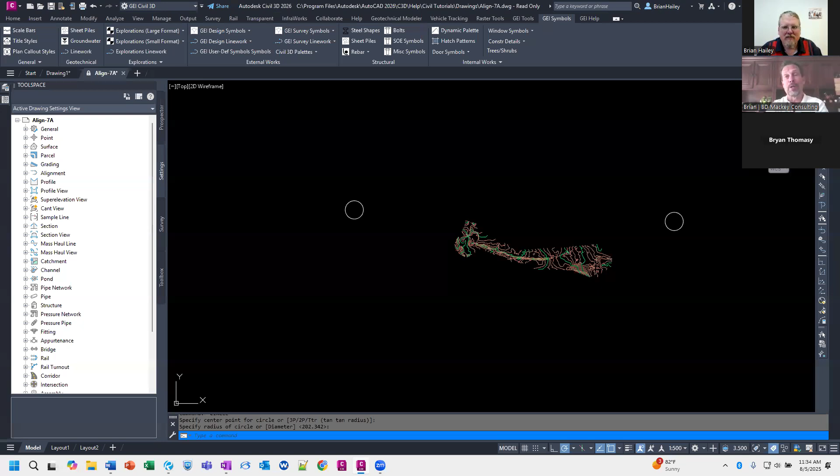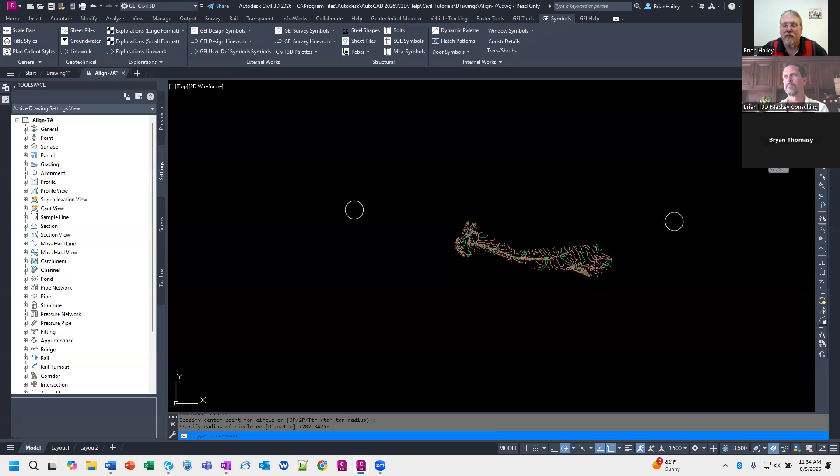I always like to start off showing something in Civil 3D before we get started, while we're waiting for the flood of questions to come into the Q&A panel. Hint, hint - again, if you don't put in questions, there's nothing for us to talk about. So please put questions into the Q&A panel. I thought what we would talk about today is smoothing. I've heard lots of people say, ooh, I hate those jagged contours that Civil 3D creates. I want to smooth the contours, make them look more realistic, maybe more realistic of what's really out there. So we're going to talk about different ways of smoothing when you're working with surfaces.

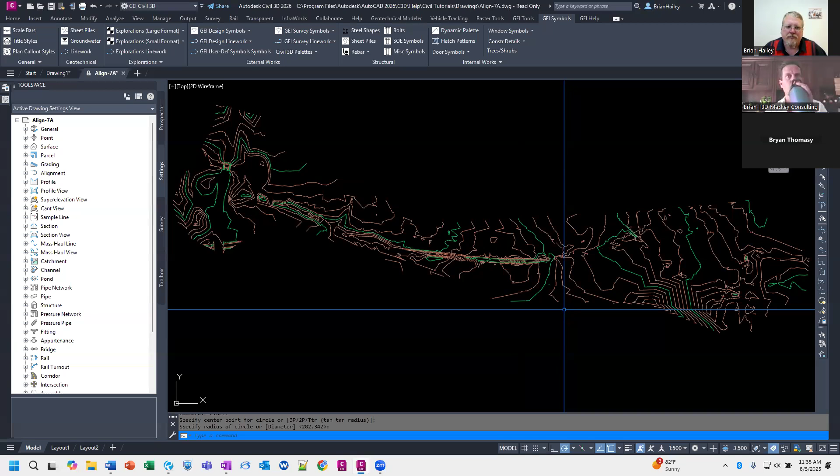The first option is to smooth the contours. Now, the way you smooth the contour - you can see all these very harsh angle points on these contours. I'm sharing my screen, right, Brian? You are, okay awesome. What we want to do is ease this up a bit, so I'm going to stay zoomed in here on this surface. Ooh, this might actually be a really good spot to demo - I'm going to move that off the screen for now, we'll come back to that. All right, I'm going to go edit the surface style.

So in the surface style, on the contours tab, we have the option for contour smoothing. Right now, the surface - the contours are not being smoothed. If you notice, I corrected myself from saying surface to contours, so we are smoothing the contours. Keep that in mind - I was going to ask that question when you said hey, we're going to smooth the contours, and I noticed you kept saying that. I was curious, is it going to smooth the surface, or is this just cleaning up the contours? So there's a very distinct difference here, and I'll explain what the difference is.

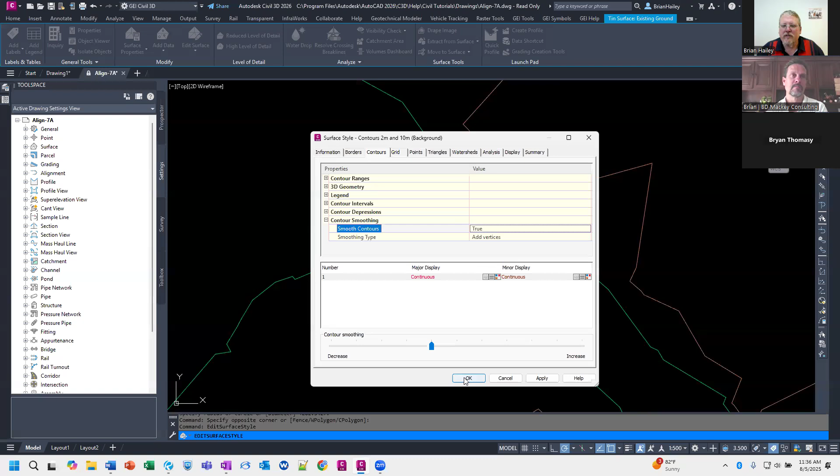I'm going to change this from false to true, and simply hit OK. You can see these contours are now much smoother. All right, if I go back into the style, you'll notice that there's a contour smoothing option down here at the bottom.

So if I bump this all the way up to the top, they're now even smoother. What this has done is smoothed the display of the contours. This is not to smooth the surface, this is to smooth the display of the contours. And you can run into situations where contours actually end up crossing each other based off of the smoothing.

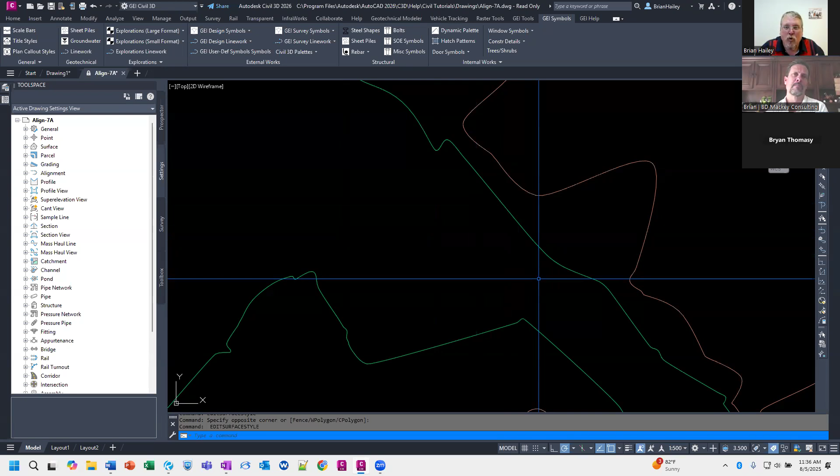Which is what I think might happen down here. Oh, that was close. No, go... right there. Yeah, boom. See, it's crossing, the contours are crossing each other. And the reason is we didn't smooth the surface, we smoothed the display of the contours to make it look better.

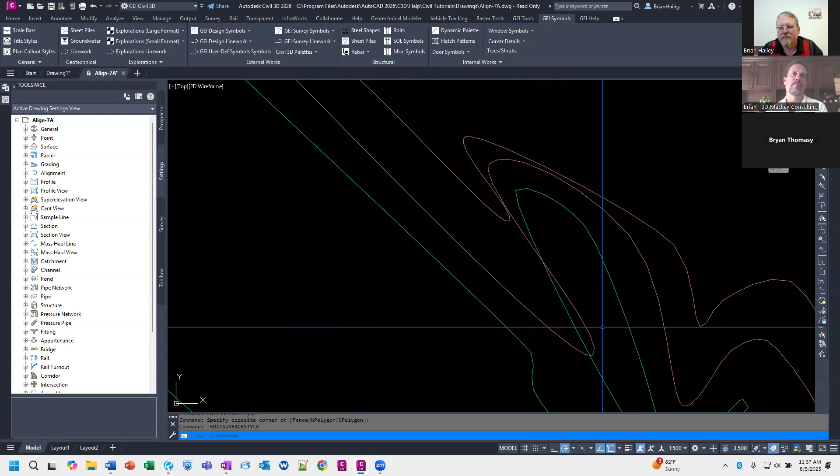Correct me if I'm wrong, but didn't it basically just say, hey, I'm going to take a polyline and convert it to a spline? I mean, that's basically what it looks like it did. And that smoothing factor deals with how severely it's splined. I don't know if it's exactly that, but it's that concept, right?

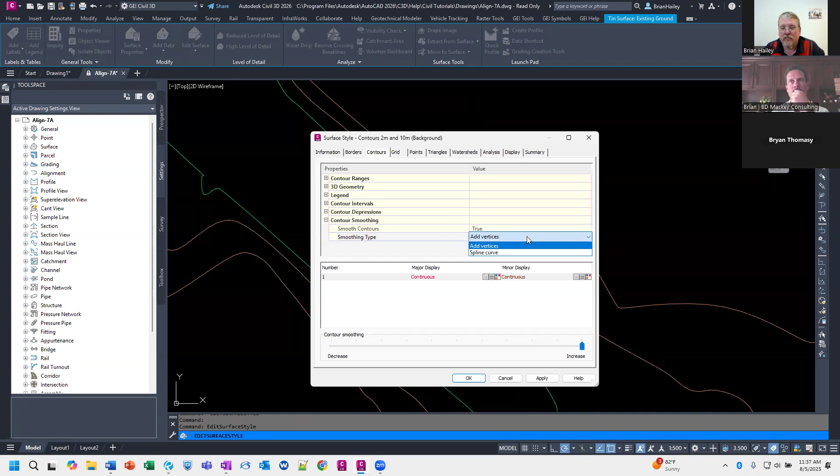Let me go back into the surface style. What you'll notice under the contour smoothing is there's actually two different options: one is add vertices and the other is spline curve. Right now it's set to add vertices. What I'm going to do is extract all these contours as polylines so we can see the difference between add vertices and spline curves.

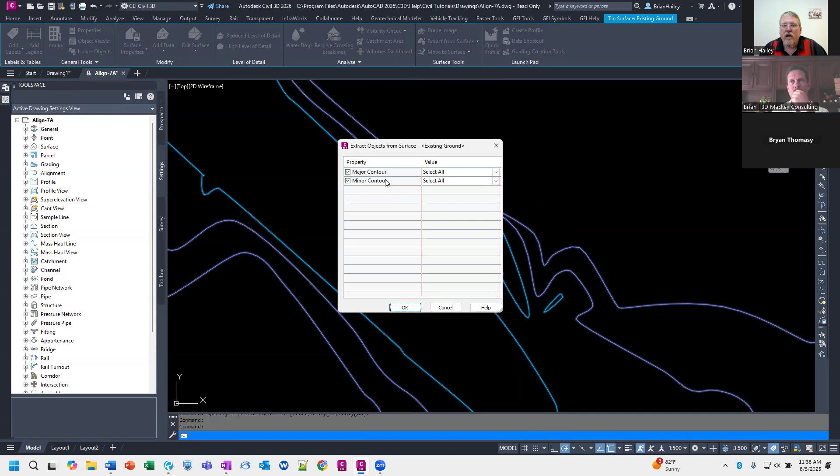I'm going to select the surface, go to extract from surface, and extract all the major and minor contours. Now you can see we've got polylines on top of the contours. Let's change the display of all of these to red, just so we can see them better, and send them to the back of the draw order.

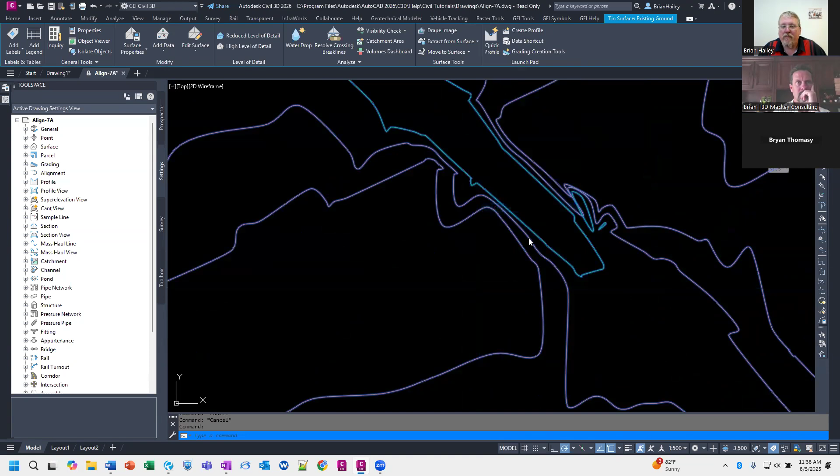So they're still there, the surface is displaying on top of them. Now what I'm going to do is change that smoothing type from add vertices to spline curve. So go back into the surface style, and I'll change that contour smoothing from add vertices to spline curve.

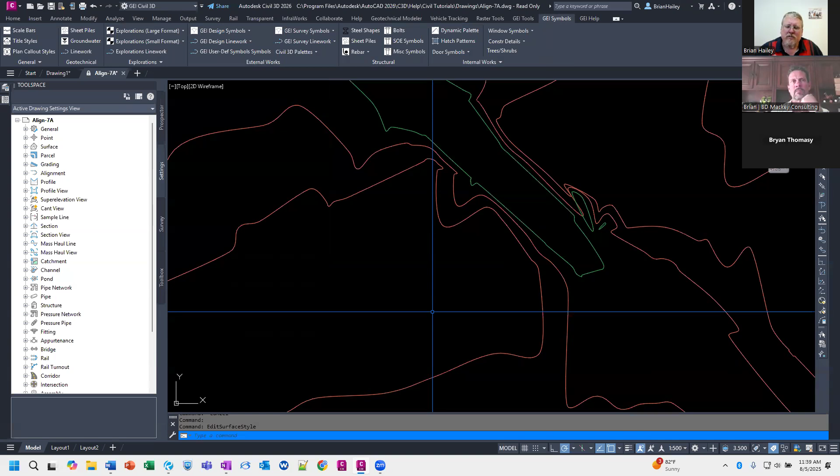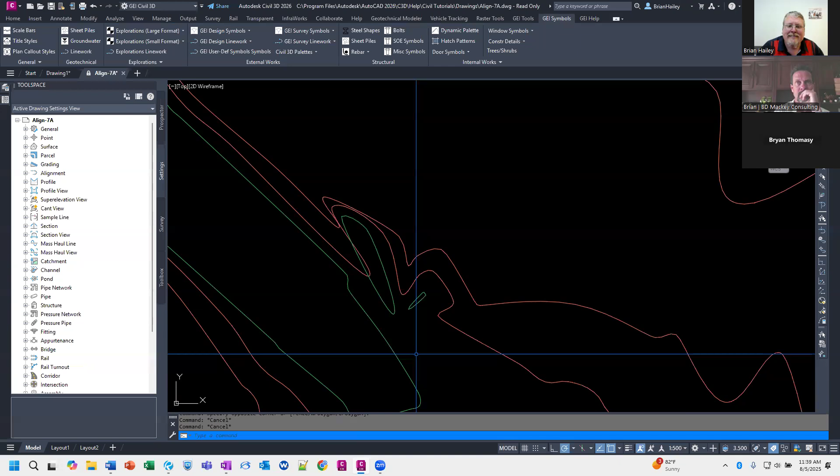What you'll notice is this contour smoothing option is no longer available for spline curve. When I hit OK, you'd expect to notice a huge difference between add vertices and... wait, there's no difference here. If there was a difference, I should see all those red polylines underneath those contours, but they're not showing up. So as far as I can tell, there is no difference between add vertices and spline curves.

The only difference I've found, let me go back into my style, is that when this is set to spline curve, you don't get the option to change the smoothing factor. Now, I have a question: before you changed it from add vertices to spline curve, you went and did the increase/decrease - does that affect the spline? It does. You just can't change it when it's set to spline curve.

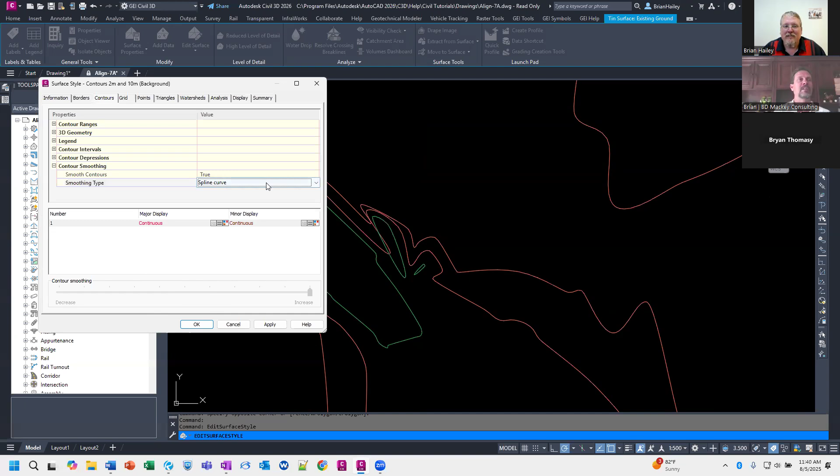So if you go back and change it to add vertices and decrease it, if I set it to say halfway, you'll see all those red contours under there because they're now different. But let me go ahead and do that same thing again - I'll erase all those polylines I've drawn. But if you were to do spline now, it's going to use that new value. Exactly, that's what I was going to show.

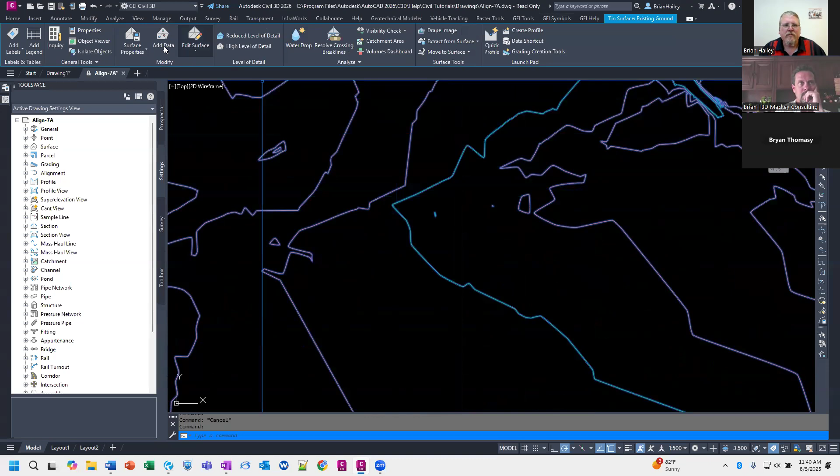We'll go ahead and extract all those, extract from surface, extract objects. Again, we'll make all those red and send them to the back. Now if I edit the style and change that back from add vertices to spline curve and hit OK, again, it doesn't change.

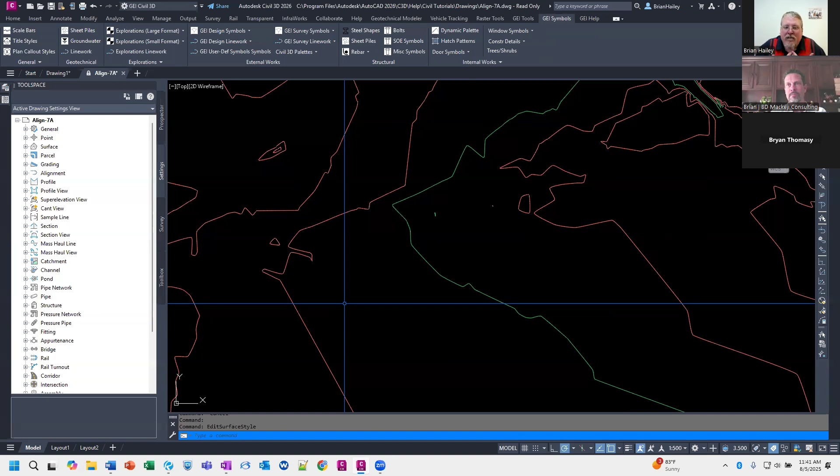I have absolutely no clue why those two options exist, and why spline is even there as an option. There is zero difference between them. I even went so far as to extract the contours using one method, extract the contours with the other method, and do a map clean on top of them - it deleted exactly half the objects I created because they were all exactly duplicate. There is no difference. If anybody knows of a difference, please, I would love to know what it is.

So my question is, is that like an old thing where they originally did it and automatically just had the add vertices, and then somebody came back and said, I want splines? They didn't want to remove the old stuff, so you get both options?

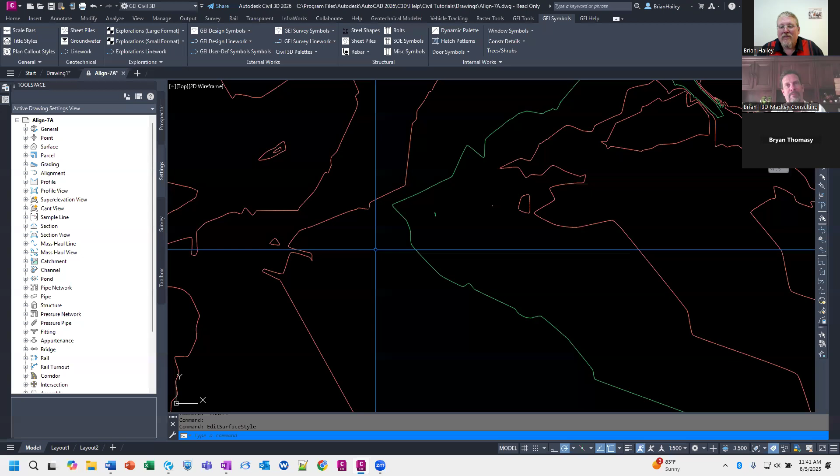Could be, but here's the fun part. If I go into the help file for this, we go down to the contour smoothing.

Add vertices. Add vertices along the contours. This option supplements points on the contours when smoothing them, giving them a more noticeably curved appearance while maintaining the highest level of integrity relative to the surface.

Spline curve. Passes a spline curve through the contour points. This option creates the smoothest contour representation. No, it doesn't. It creates the exact same contour representation as add vertices.

That's funny. Yeah, so Robert asked to follow up: if you extract contours, when it's set up as add vertices versus spline, do you get a polyline or a spline? You get exactly the same thing. So even when you extract, it doesn't matter, like hey, I'm extracting polyline versus spline.

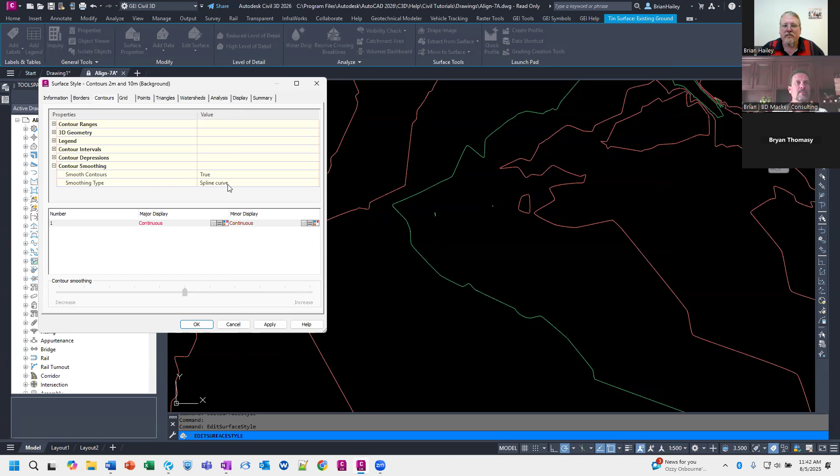So you can see it's set to spline curve right now. And if I go ahead and get rid of all those ones that I had created, we'll extract again. Actually, let me do this. I'm just going to take those. That's why I drew these circles in here. I'm just going to move them from the center here to the center over there, and that way I just moved them over.

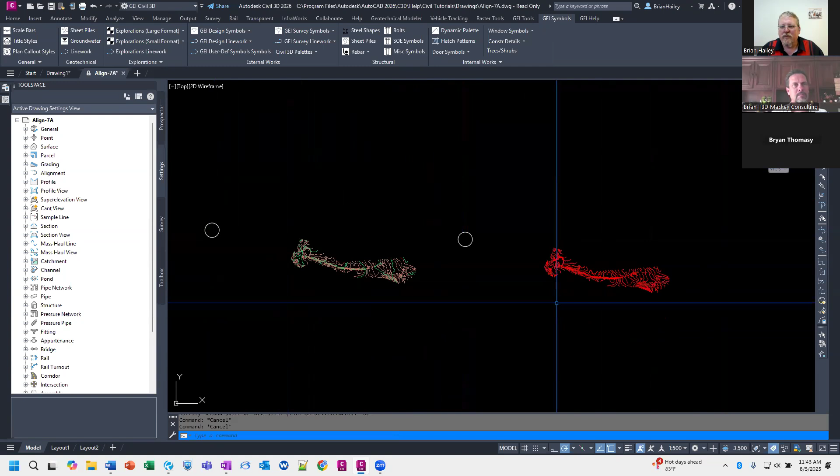But if it's set... I'm pretty sure it's set. Did I change it to spline? Yeah, it's set to spline curve. And now when I extract, I still just get polylines.

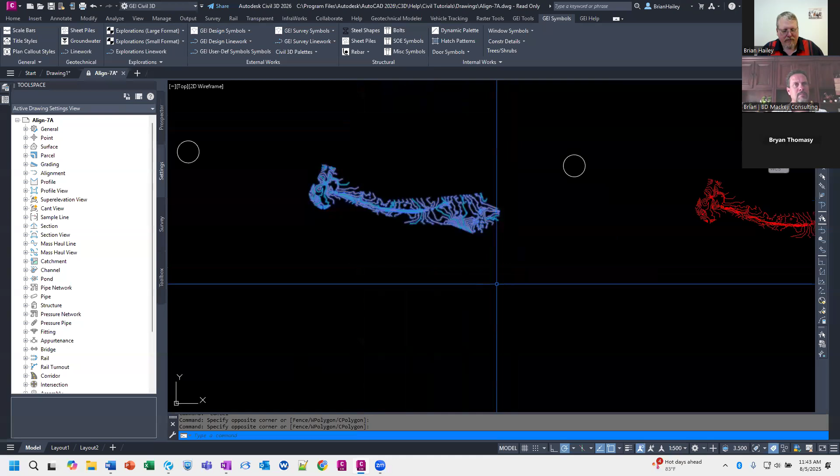And if I copy these, if I just move these, I'll just move again from the center to the center, so all the copies are right on top of each other. And I do the map clean. Go ahead and select those, and the only thing I'm going to do is the delete duplicates with a tolerance of zero.

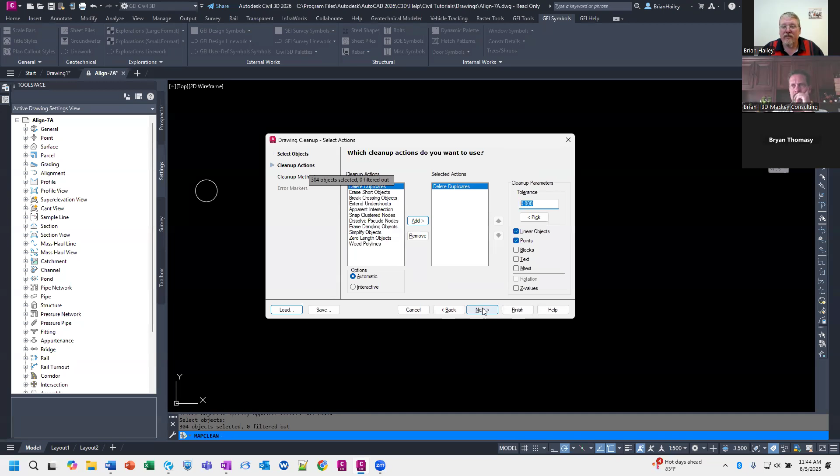So in order for them to be considered duplicate, they have to be exactly the same. So you can see 304 objects were selected. Half of that would be 152. So if it deletes 152 objects, we know they were all exactly the same.

Brian, so if you ever have somebody say, oh, you should be using this one instead, you can just say bullshit. Why? You can say, explain to me, show me what the difference is, and then maybe I'll use it.

And Brian said he loves this idea, but he runs into performance issues when the polylines have too many vertices, for the smooth contours.

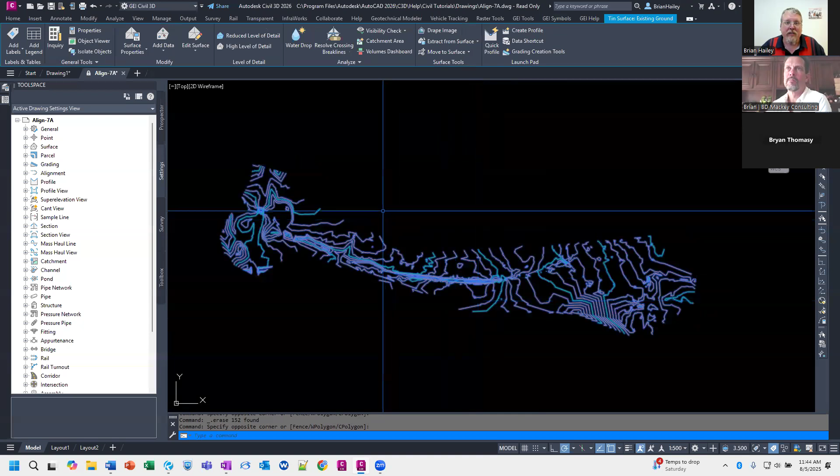Okay, so that's smoothing the contours. Now, actually, let me show something here real quick. I'm going to edit the style and set this back to the maxed out smoothness that we can possibly get for this. Set that back to add vertices, we'll bump that up all the way. And here's one of the issues you might run into when you're dealing with it.

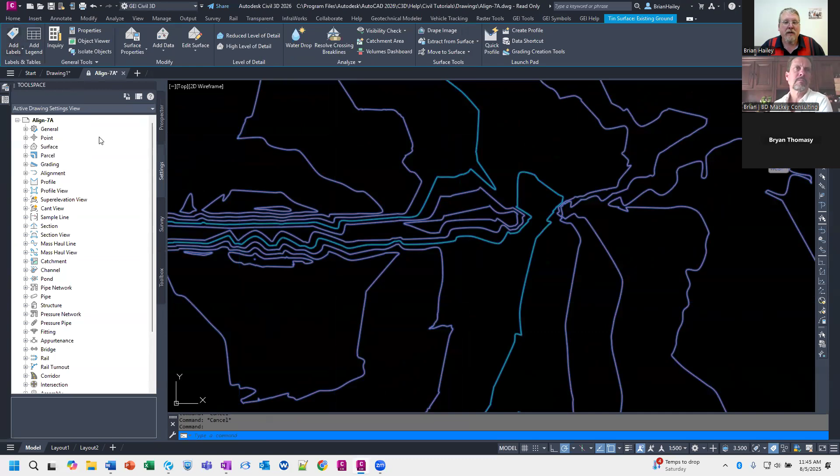So what I need to do is put in a spot elevation label here. So I'm going to grab the surface, add labels, spot elevation, and I'm simply going to snap to this contour. And what you can see, this contour is passing over a spot that is at elevation 61.95.

This label is labeling the elevation of the surface. The contour has been edited so it looks smoother. It did not smooth the surface. In essence, what has happened here is we have changed the display of the contour relative to the surface in order to make them look pretty.

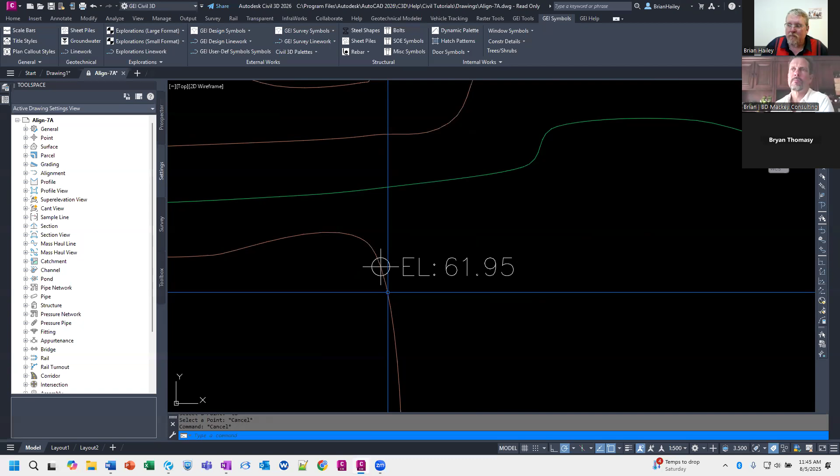We did not change the surface, right? So when you're dealing with a surface and your contours, what's more important? Is it more important that your contours look pretty, or is it more important that your contours show you really what's happening with the surface? So, one's not always right, one's not always wrong.

Yeah, I was about to say, so you're saying appearance versus accuracy. Right, exactly. Yeah, and I've got my own opinions on that one. So as an engineer, when I'm working with the surface, I want the contours to give me a glimpse into what the surface is actually doing. I actually want to see the roughness to it, it gives me a glimpse into the surface.

However, if I was going to take this and print it out on a foam core board, stick it on an easel and put it up in front of city council, maybe in that situation, the pretty contours are more important.

So basically, you're saying always smooth the contours before you give it to an architect. As the guy who works with architects, yeah, I'm just basically saying spline the crap out of it if you're going to give it to an architect.

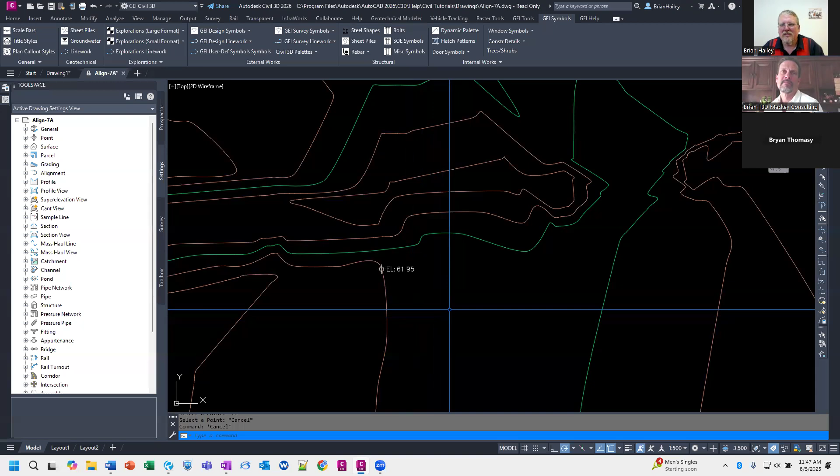Yeah, I'm in agreement with a lot of individuals. I like the accuracy, jagged. We've got engineers that call them nervous contours because they jag it around a little bit. But there's ways to smooth your surface without sacrificing accuracy. So I'm going to turn off the contour smoothing here and get back to those nervous contours. And so what I'm going to do now is I'm actually going to smooth the surface. So what this will do is edit the surface and change the surface itself.

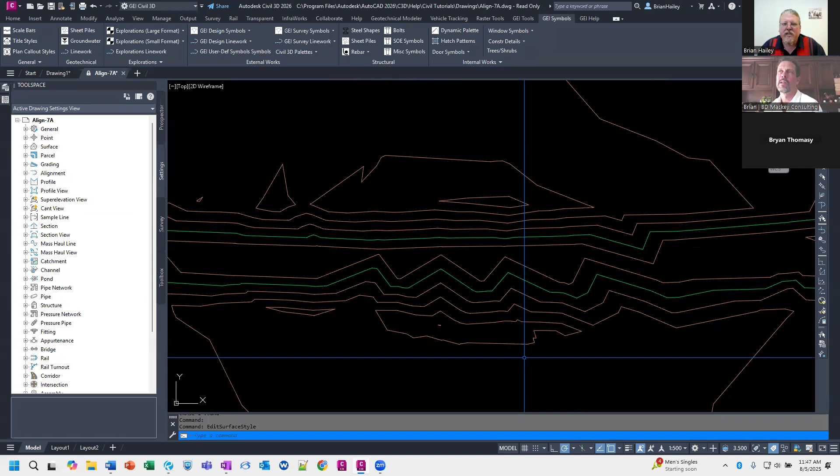All right, so this is an edit. I'm going to select my surface, edit surface, and there it is, smooth surface. It's also available under your tool space if you want to go that route as well. The method I'm going to use is the natural neighbor interpolation. The reason I'm going to do this is because this is the one I know how to demo.

The kriging is something I've never used. I think it has to deal with like if you have multiple surfaces. So if you have the existing ground surface, then underneath that you have another layer, but you only have very few points, it'll try to smooth it relative to another surface. I could be completely off on that, but I think it has something to do with that. So I'm going to leave this set to the natural neighbor interpolation.

My output location, I'm going to do grid-based. My output region, so which part of the surface do you want to smooth? If you're smoothing contours, it's all or nothing. With this, I can say I want to smooth this part of the surface, right? Because maybe I've got a street that's going next to a park. Well, the surveyor went out and took shots on the park, and now I've got these very pointy hills. Well, I want to smooth those hills out, but I still want to maintain the angle points on the street.

So I'm just going to pick a small little region here. I'm going to do a polygon, so O for polygon. And I'm interested in, say, for example, this area here. Because I'm doing a grid based, it's kind of asking for the grid. So I'm going to do, I don't know, 5 by 5. I've actually never done this for this particular surface, so I don't know if this is good or not.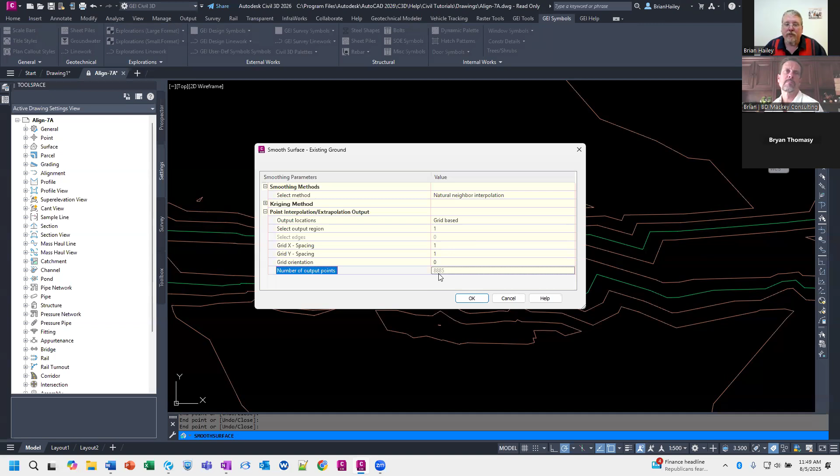So you can see it's going to be adding 352 points, which isn't a whole lot. So I'm going to drop this down to 1 by 1, which is going to add another almost 9,000 points to the surface, so you can see we're actually changing the surface. So I'll go ahead and select OK here, and you can see it smoothed the surface rather than just smoothing the contours. So if I were to put a spot elevation on here and snap to this contour, you can see it's exactly that elevation.

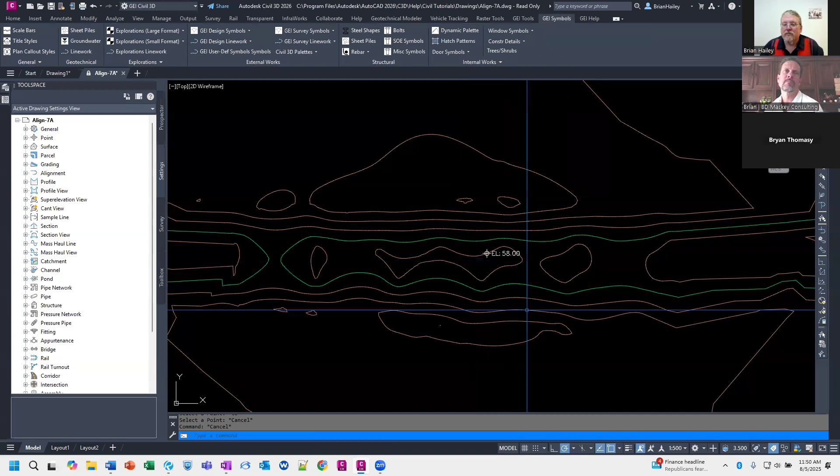So what has this done to the surface? Well, in that area that I did the smoothing, if I go back into my surface style - and you shouldn't do this, you should switch to a different style, but just for this - I'm going to turn on the triangles. You can see it's added a grid of points in this area. So rather than doing a direct or linear interpolation between points, it interpolates it differently. However, it still does keep all the original points. So if you had a feature line, or rather a break line or a point in the surface, it maintains those elevations, but it just changed how it goes from one known elevation to another elevation. It goes over and up and then over, and it smooths it out.

So hopefully that helps folks understand what the difference is between contour smoothing and surface smoothing, and why I was really confused when I was trying to figure out the difference between add vertices and spline curves in the contour smoothing. Tom also says be careful because it can smooth in places you might not want, such as along a wall or curb face - that comment came up when you were doing contours. And John Mayo said, yeah, it definitely does not match your tin surface if you're just contour smoothing. Now, if somebody needs to smooth it, make it look pretty, send it off to an architect, and then come back to what they had originally, how would you do that, Brian?

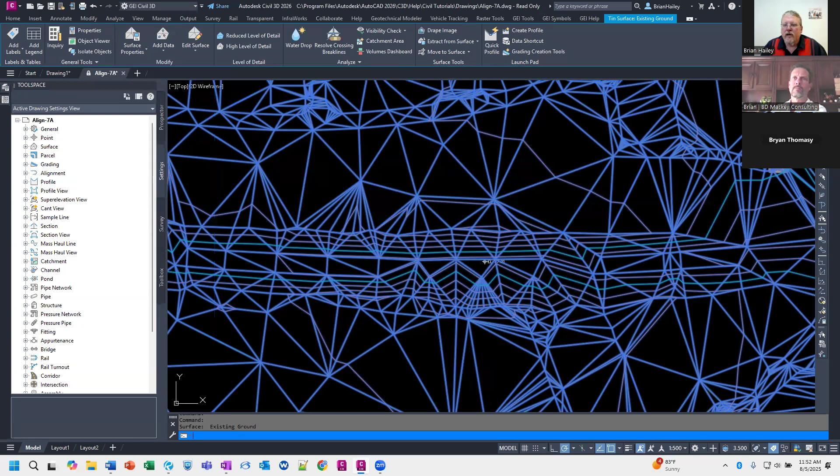So if I go into my surface properties and go to my definition, you can see it just added it as an edit to the definition of the surface. So if I want to, I could just uncheck this, hit OK, rebuild the surface, and it goes back the way it was. If I want to turn it back on, I can toggle that back on, hit OK, and it's back on.

If I need to add additional data in this area, back in the surface properties, you would just make sure the smooth surface is below all that data. And you can use the arrows on the side here to reorder them. Is that kind of what you were alluding to, Brian?

I was leading the question because I knew maybe some individuals out there didn't realize that once you do this edit, it's almost like a boundary as well. You will have to refresh, reset it, or remove it to further your design and then re-add it after. It's not something that's irreparable.

Right, good call. And Adam says he wants to use—I keep reading it as cringing because you're cringing. You didn't want to do it. Oh yeah, I agree, cringe.

The kriging method worked really well to smooth across an empty space so I could approximate what was outside the available data. I wouldn't use it very far, but in my case I only needed about 15 to 20 more feet of the softball field. Oh, so interesting—the kriging method actually took it out beyond the limit of the surface. That's how it sounded to me. Okay, interesting.

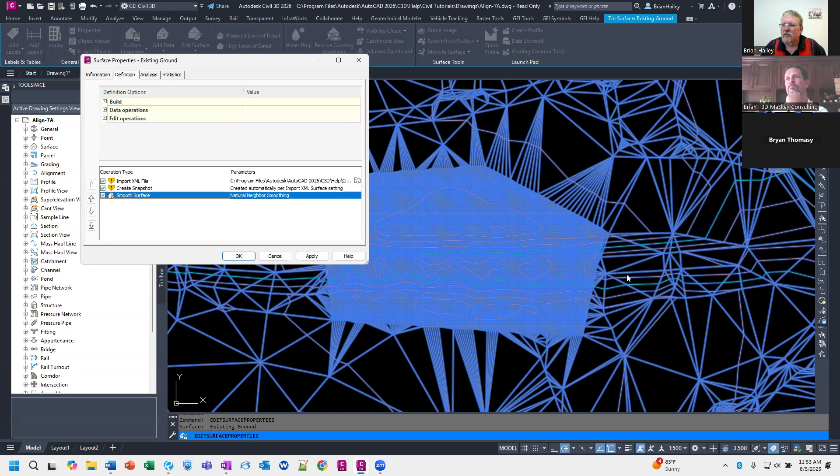Awesome. Okay, so that's kind of my intro little discussion. That went a little bit longer than I normally go on this, but I find this to be fascinating.

So I like the fact that you can just toggle it on and off too. Like if you have an architect saying, I really want this to be smoothed out, but it adds too many points for you, you could just toggle it on and off before you export it to AutoCAD for the architects. Right.

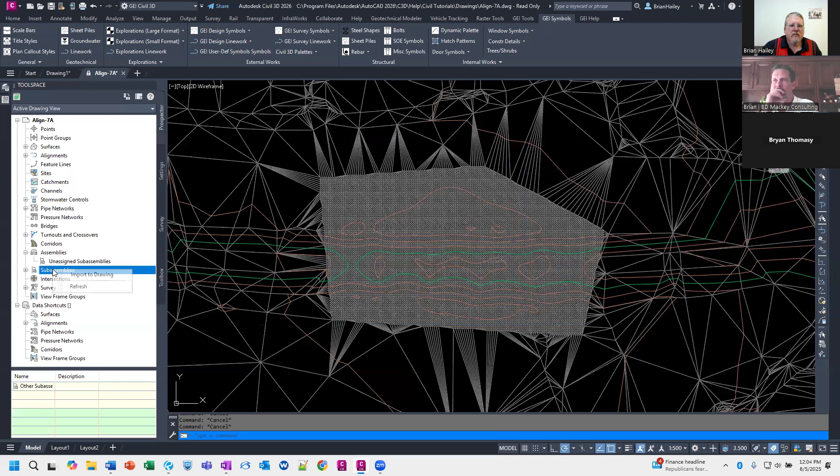Yeah, so you can add them to a catalog and then add them to a tool palette, but recently what I've been doing is just adding them to the drawing directly. So have a network drive location, or someplace in your CAD support that you robocopy to each person's computer with those custom assemblies in it. Then when I need them, I can come over to the Prospector tab, sub-assemblies, and import to drawing, and browse for that PKT file directly. I don't have to add it to a catalog or a tool palette, I can just import it directly into the drawing itself, and it is linked to the original.

So if I go... where did I put those? Here.

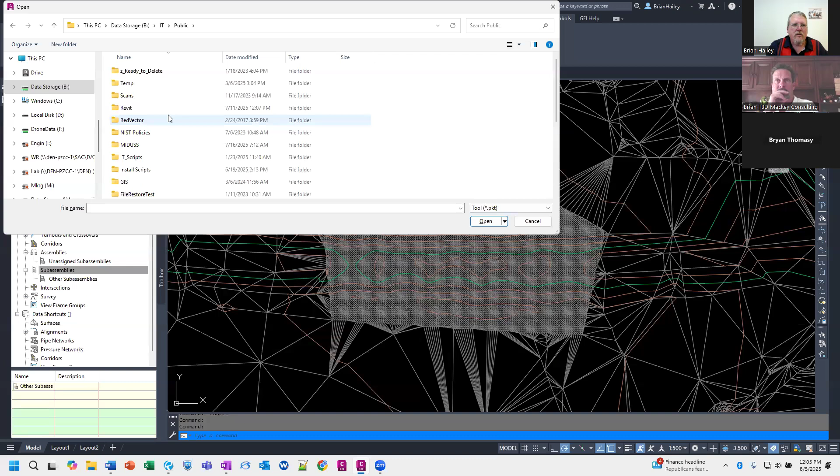If I just bring in a subassembly here... I can attach it to an assembly, or I can just insert it as a detached subassembly, and bring it in directly. And there's the subassembly. So you don't need to do all that other stuff any longer, you can just organize them in a folder and say, here they are.

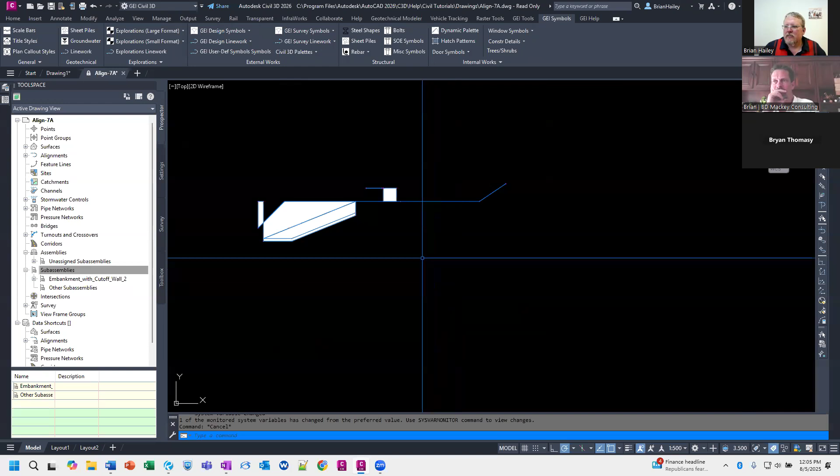Anybody else doing it differently? Okay, but that's the way I would recommend it, Kevin.

Brian asked a question about corridor transitions. I'm trying to model a parallel parking lane that occurs along a standard residential road section. I've tried with both corridor transition for the widening, and also with an offset alignment, and haven't had perfect results with either. How would you go about it? I don't like using a ton of regions because the surface often has small breaks at the edges of regions. I really like the transition methods, but it doesn't remain perpendicular to the curb since my assembly is usually based on the center of the road section. The offset alignment works okay, but similar problem with region edges. I'm sure there are various ways to go about this, but I'd love your thoughts and best practices.

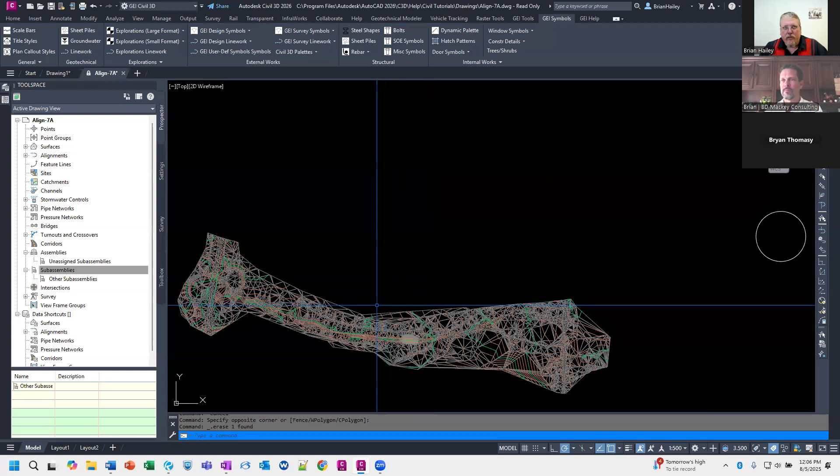Okay, let's see if I can... let's see. Let me open up a drawing here. Let's see if this drawing works.

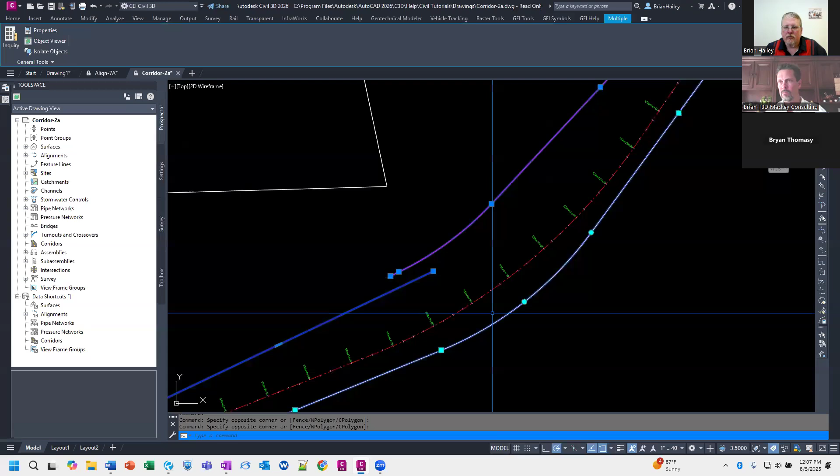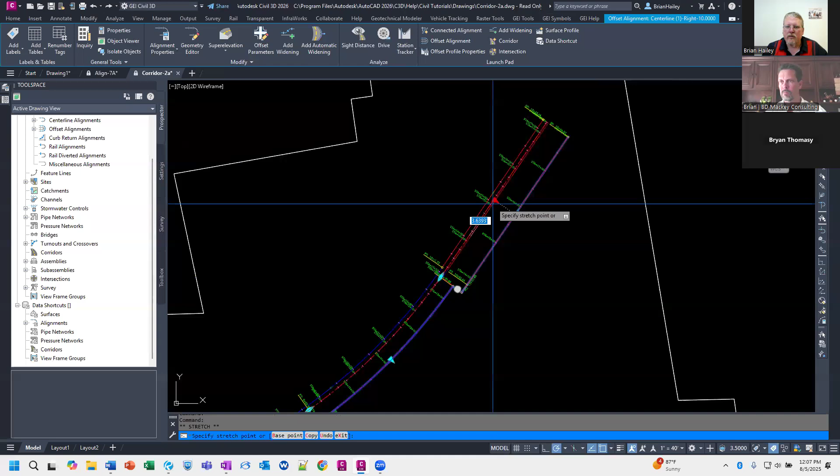All right, so I have my alignment, let me make sure it has a profile. Good. And I'm going to go ahead and create an offset alignment. Sure, why not? And then we'll go ahead and add a little something here, pull that back in. Something like that - I'm just doing this real quick and dirty, just so we have something in here.

So I assume it's something along these lines, right? Where you've got your center line - let me get rid of some of these labels that we don't need - you have your center line and then an offset with these transitions. And then you want the curb and gutter to follow along this offset, but you want it to be perpendicular to that offset. Does that sound right, Brian?

Okay, perfect. Yeah, are you asking me or are you asking the other Brian? I was asking the question, the original question asker. He's Brian, asking the other Brian. He's asking the Brian, not asking those two Brians. I'm asking that Brian. God, we need another Brian.

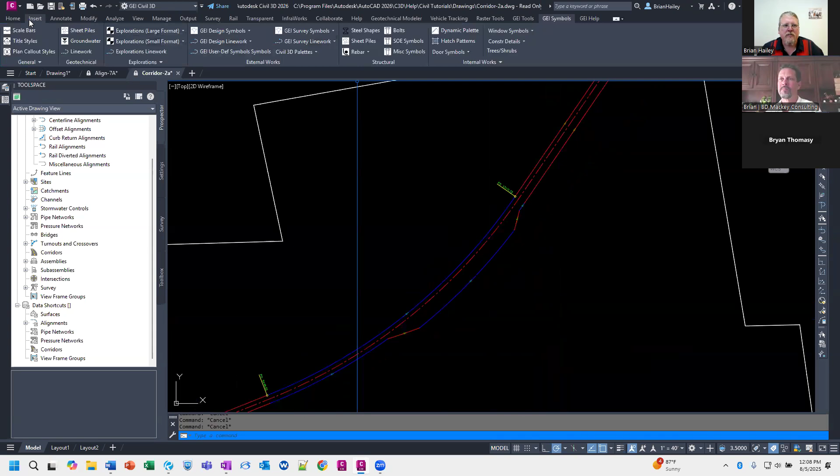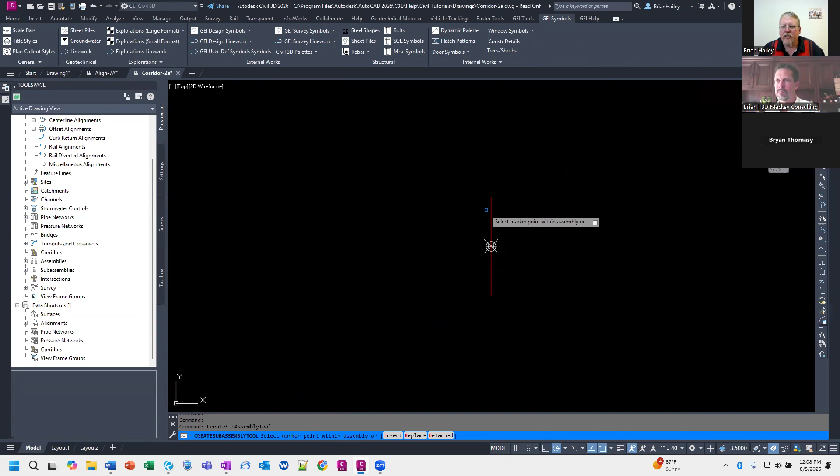So what I would do is I would create... well, let me just go do this real quick. Let me go create an assembly. All right, this will be 'lane'. And to this we will bring up my tool palettes and just add a lane in here. Basically what I would do is have this lane target this alignment.

So let me go ahead and do that. Home, Corridor, Create Corridor. The alignment will be this alignment... I chose the wrong profile - the layout profile - and then the assembly will be the only assembly I have. All right, so you can see it's going along, but then what I'm going to do is target this offset. So we'll edit the targets for that lane, offset.

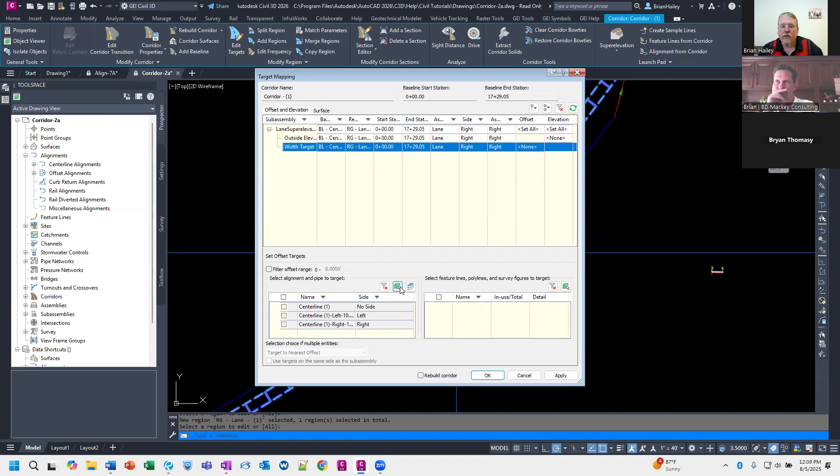Voila. Now, what you might be tempted to do is create a profile for this alignment and then attach the curb and gutter and the sidewalk and anything else to this alignment. The problem is you want this to be dynamic to the corridor.

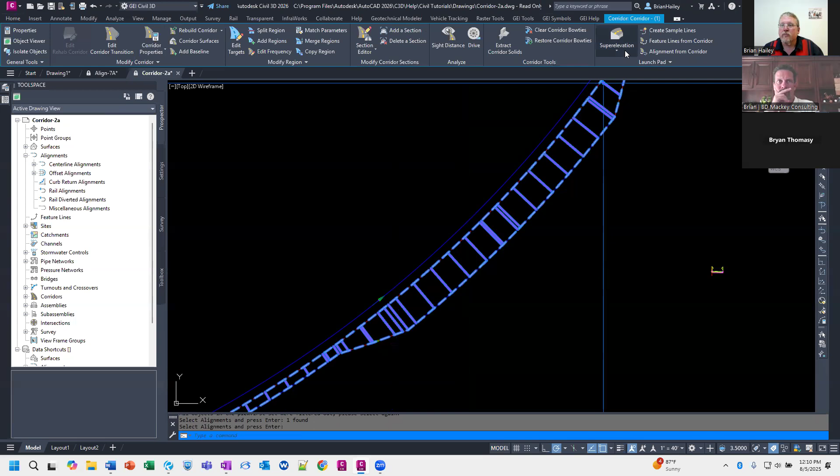So what I'm going to do instead is grab the corridor and extract a feature line. It's up here somewhere—feature lines from corridors. I'm not interested in the sub, the pave 2, the pave 1, or the ETW. I just want this here. I'm going to extract that, and I now have a feature line running along here.

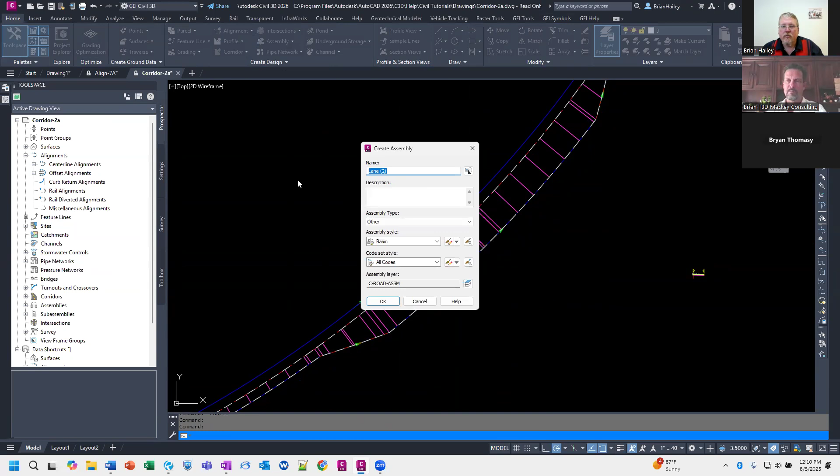And then I can create a new assembly that is the curb and sidewalk and everything else.

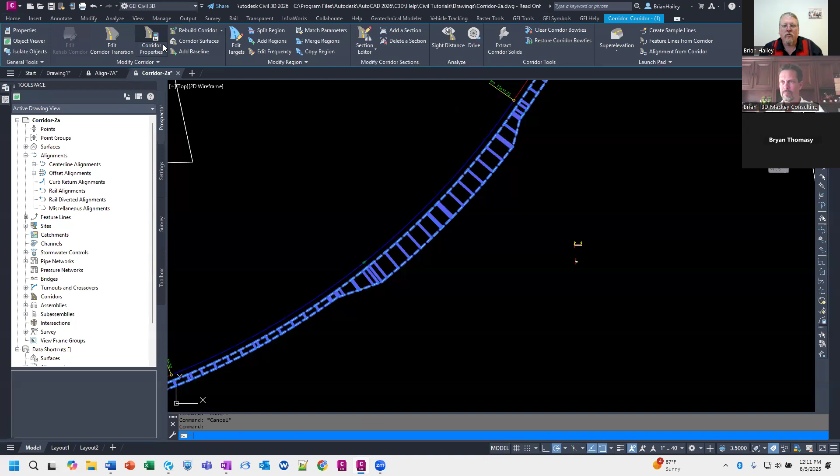And then we will attach my curb to that, and then add that feature line as a baseline to the corridor. So go back into the corridor properties, parameters, we will add a baseline and it will be a feature line. We'll select the feature line there, and then we will add that curb assembly.

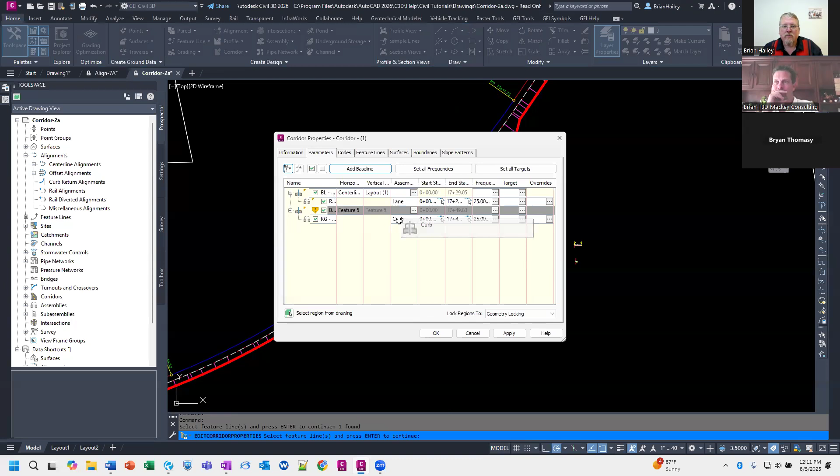Now this isn't perfect. Did I do that? No, that's right. And so now you can see we've got our curb and gutter, and it's always going to be perpendicular to that feature line. So it's relative to that.

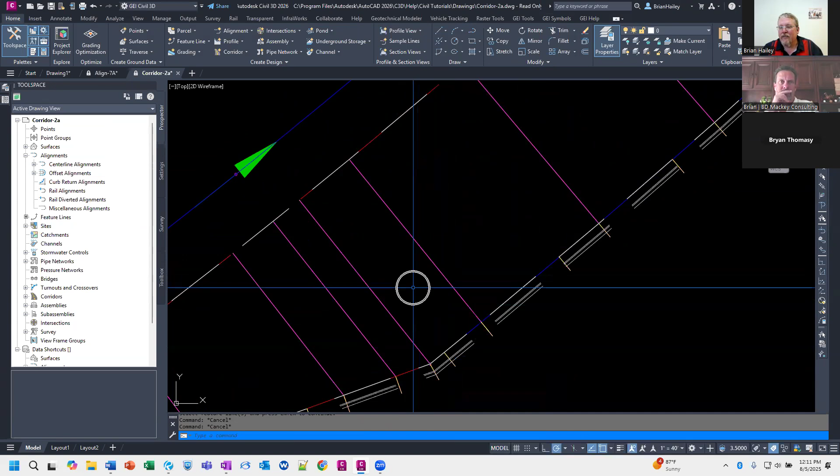The drawback to this is the sections don't necessarily line up. So as you can see, we have a little section here that's not in the curb and gutter, that's not in the lane. That's one of the drawbacks of doing it this way. But in most cases, that really shouldn't matter.

So this is the approach I would take, Brian. So what do you think? Oh, you put a comment in there.

Based off a feature line that's built from the same corridor, seems like a circular reference. It's not a circular reference though, because the curb assembly is attached to the feature line that is created from the baseline that is created from the alignment and profile. So it's one direction, it never goes back on itself. If I were to create a feature line from this, and then extract that and create a feature line from this, which then references back to it, then it would be circular. But this is just one direction in this case.

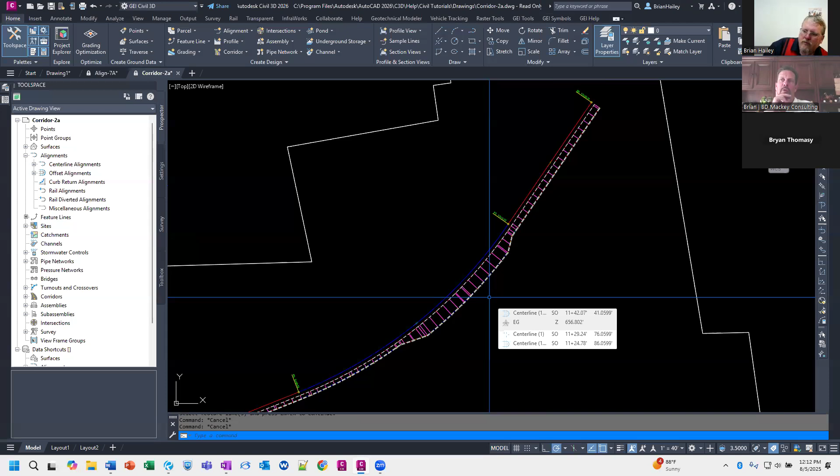And what if you need your parking to drain out to the road? So basically it's like, hey, I need a low point here that's a little bit lower than what it would normally be based just off of the curb and gutter, that sort of thing. Or if you're needing it to tilt back towards the center line of the road.

Yeah, so remember that the road flow line—the road is following the profile of the alignment, and this feature line is at 2% or whatever slope off of that, so it's going to be sloping away. But if I need this to differ from that, then you might be able to use a transition on the lane. So I can say, hey, I'm going to transition from a 2% slope down to a 3% slope, and then back up to a 2% slope, and then just go 2% either way from there.

Or you can extract this feature line and not make it dynamic. No, you would still want to make it dynamic.

Well, so Brian, yeah, what he really—if I'm understanding him properly—Mr. Jacobs is actually wanting the parking to flow to a pan that would represent the flow line of the original flow of the road, so that it would continue the flow of the road through. Yeah, and I guess Brian is saying that I am in his head, kind of scary. So basically you wouldn't have that bump out anymore.

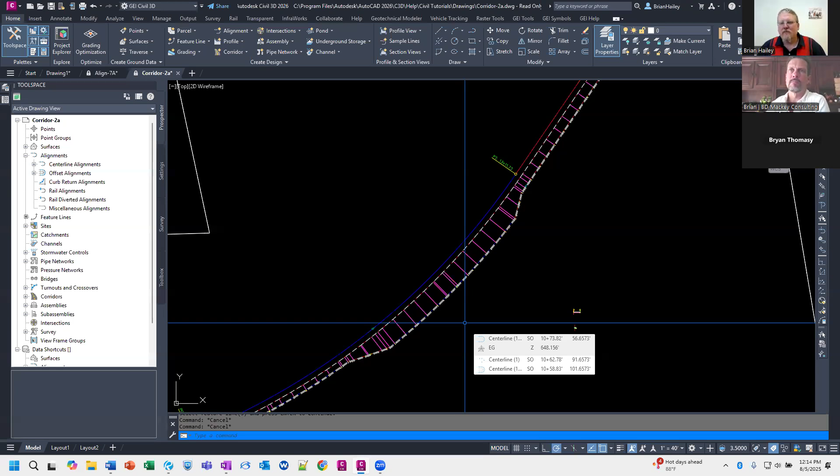You would want to save that bump out, but at that point you would want to create a new region, just one region with an additional piece that goes out, going up at 2% or whatever your slope is, attaching out to the parking area. Exactly. So this area would just be done the same way we've done it before, and everything. Honestly, anything outside of this feature line, this curb, would still be the same as before.

Still be applicable, would it be? Well, what you would do is you could put a lane and a curb to it, and then the lane would go to 0 whenever it would go back to—oh, good call. Yep, the parking area would go back to 0. So you would actually have a lane length and a curb attached to that, and then the lane length would just rubber band back and forth.

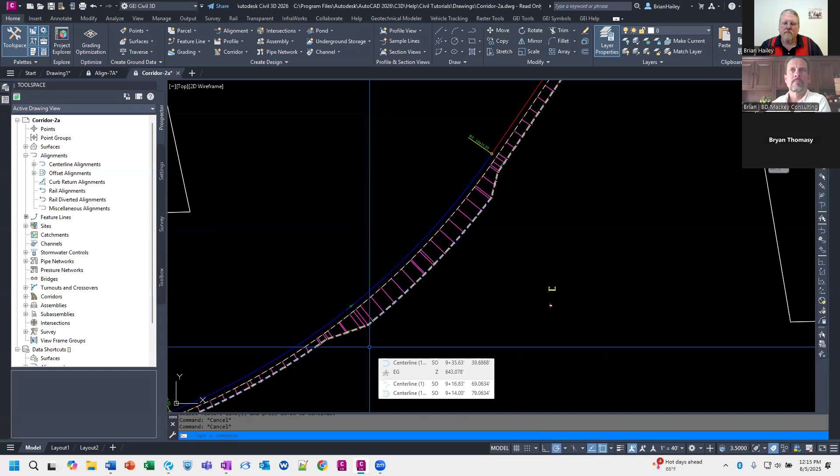Yep, good call. So basically what Brian is saying is we would copy this—I'll just copy this assembly, or the sub-assembly, right onto itself. So this would be the normal lane, and then this would be the lane coming up from. So instead of—come on—yeah, you're going to put a positive 2%. Yeah.

Positive 2% on there like that. And where you don't want the pan, this is basically an offset of 0 relative to this point here.

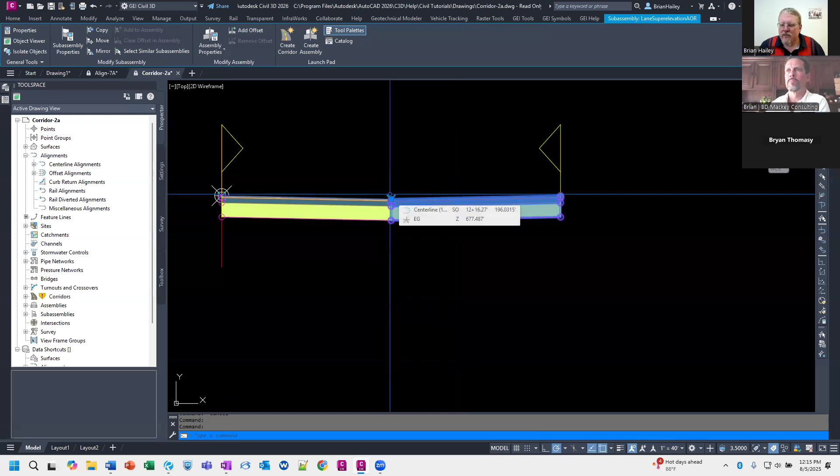Yep, good call, Brian. I like that. See, I knew there was a reason we kept you around. Yeah, okay, other than just making fun of.

So are you guys talking about transitioning the second lane slope to 0? Absolutely, yep, it'll rubber band back and forth. And actually, you don't have to set the transition. The alignment itself, when you target the alignment, it'll bring it back to 0 for you.

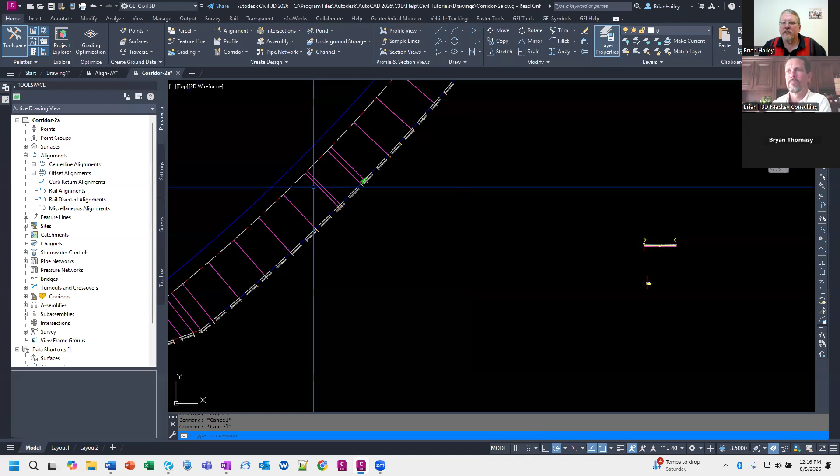Assuming the offset is the lane width, which I didn't do in this example. Exactly, yeah. And a 0 dimension does not cause an error. No, because you're not dividing by 0. The moment you divide by 0, then you get a problem.

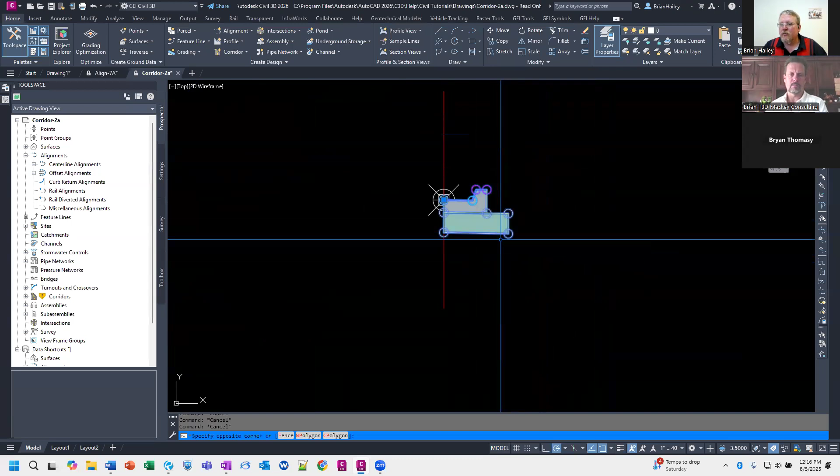So what Robert put in the chat - does 0 dimension no longer cause an error? It still causes an error in some places. For example, this curb - when you tell it to go to a width of 0, yeah, in some cases. Other cases it's fine.

But I think what Brian was referring to is an offset width of 0. Just to touch on what Robert was talking about, if I go into my subassembly properties and go to my parameters, we have all these different parameters.

And sometimes if you set these to 0 - let's try dimension B. If I set that to 0, you can see it just messes things up, nasty. So what I've always told people is never use a value of 0 in a subassembly. I always set it to something really, really ridiculously small, but that's not necessarily true.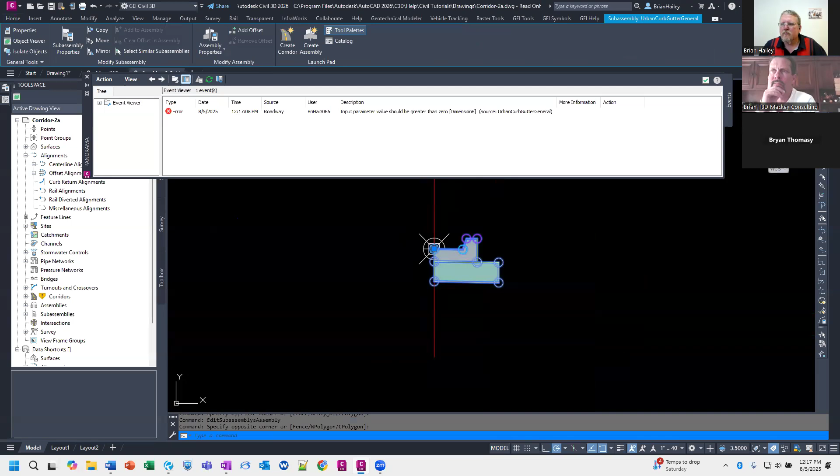John mentioned put in 0.0001. I go out to 3 decimal places because normally my stuff's out to 2 decimal places when I'm labeling, so if you go out to the third... But if you go into the help for the subassembly, some of these will tell you that you can't do it. For example, dimension A here has to be a numeric positive non-zero number. So any of these that say non-zero, you can't put a 0 in.

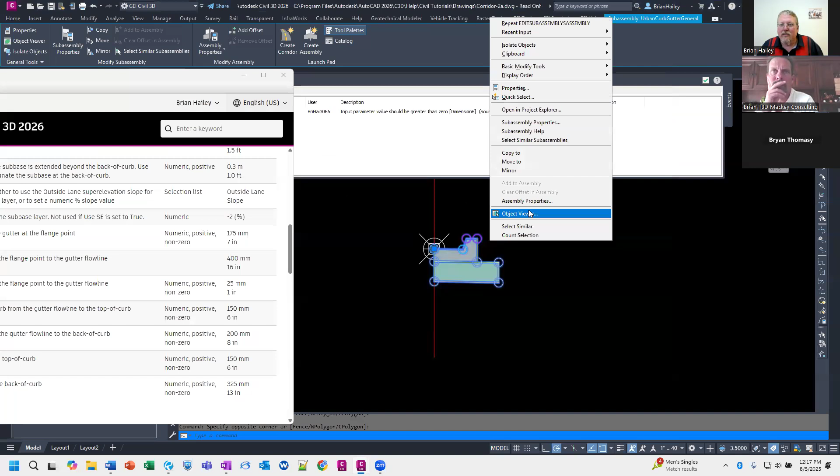Anything that doesn't say that, you should be able to, but I think I actually used B in this example, didn't I? Didn't I set B to 0 and it still failed? So I guess that's not a foolproof method. So just don't use 0 in subassemblies.

Mr. Jacob is saying that this looks like it's going to be great, he's going to give it a try. Awesome, good to hear, Jake. Good to hear, Brian. I almost called him Tom Jacob.

Richardson asks, what is your recommendation for a company's custom pressure pipe catalog when creating a deployment for a new version of the software? Do you use a shared folder and link all versions of the same content, create a copy of the current content into a subfolder of the new deployment files, recreate the catalogs from out of the box content, or something else? So the way we do it, if I go into our CAD support folder here.

That's a very open-ended question, that is highly customizable. I played around with doing it as 2 different methods. So if I come under CAD support here, under common, we have ENU, which for those of you that have ever seen the ENU folder when browsing through the Autodesk folders - does anybody know what ENU stands for?

English - put it in the chat if you know. Be interesting to see what people say. So I'm going to come into ENU and then pressure pipes catalogs, and this is where you can keep your catalogs, right? This is great because it's independent of version, so you can just continue to use the same one over and over and over again.

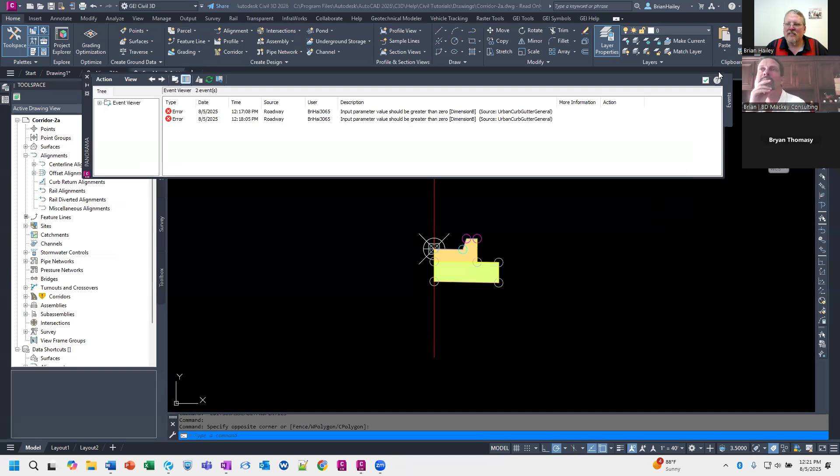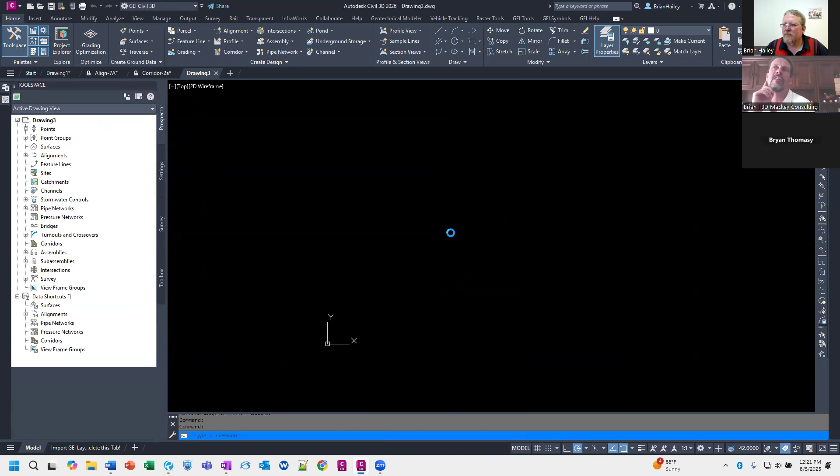It depends upon the PDF file. If the PDF file was created using a vector-based software such as Civil 3D or MicroStation, it should be pretty straightforward to bring it in. I've never had luck, Sean, doing a PDF conversion that was like a scan to PDF. If the PDF was created from a piece of software, it usually does better. Scanning's not going to do it. That's your PDF, vector versus raster PDF, and yeah, that doesn't ever work.

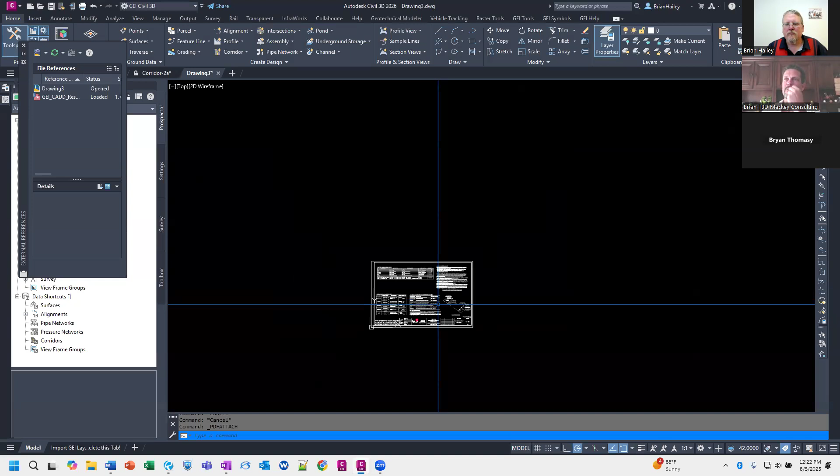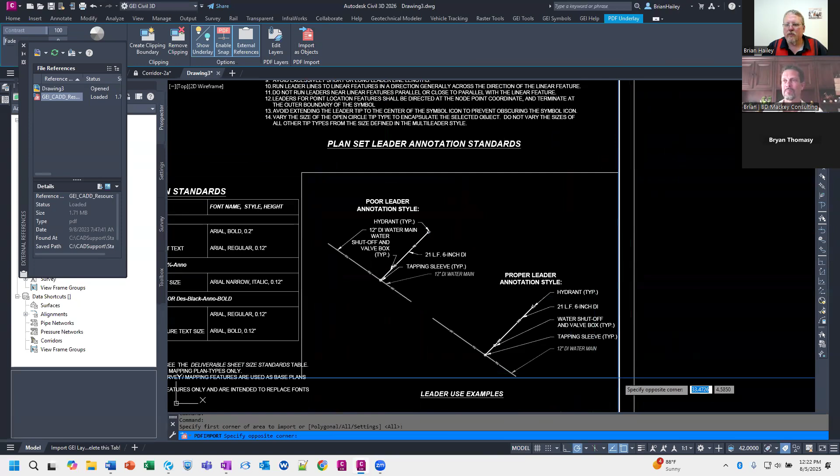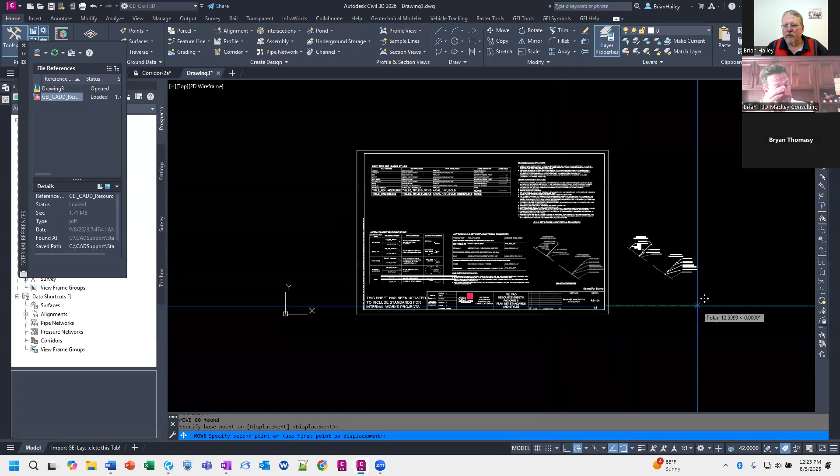So I just attach a PDF, select it, import as objects—I'll just do this region here. And I will keep it. Now we have the stuff in the drawing. Not going to be perfect. Did I move the PDF too? I did, didn't I? Oh yeah, try that again. There we go. So it did a pretty good job of it. But again, this particular PDF was created from CAD, so it's a good example. If it's a raster file, then you need to convert it to an image and bring it in through raster design, then use contour following and assign it.

Yeah, that's why AI would be fantastic for that.

Tom, it looks like I was wrong—it is English United States. Tom actually put it up there, it's a very interesting link he has. It basically switches some of the terminology, like the spelling of color is different, COLOUR versus COLOR, and there's probably a few minor things like that. But also his little links talked about terminology—like in this one, the terminology for this in Britain is this, and in the US it's this. Very interesting article, that's cool.

Thanks, Tom, appreciate it. This is one of the things I love about Civil Chat—I love finding out that I'm wrong about something, because then I can stop being wrong about it. So that's awesome.

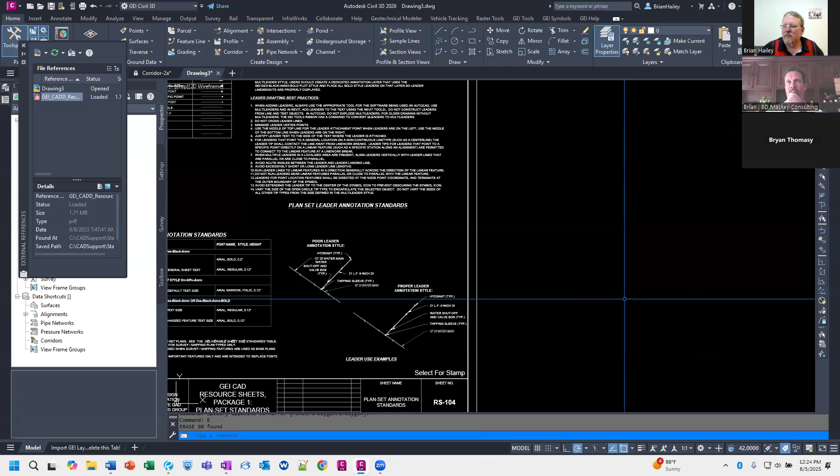The next question from Max: have either of you done anything with custom structures for gravity networks, other than adding new size parameters to them? I haven't. Have you, Brian? Nope, that's all I've done is just added size parameters.

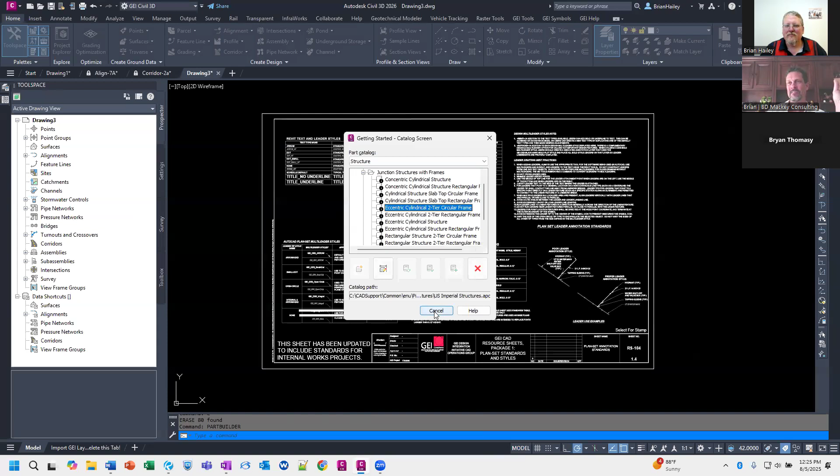We did not get into that, mainly because we're waiting on Autodesk. What I'm really wanting is to get into Inventor and create a multi-port for my structure, so the pipes don't automatically just snap to the center of my structure, because I've got diversion structures with multiple pipes that need to come into them. So when are they going to adopt what Revit has, where you can actually place where your pipes need to come into the structures in the gravity systems?

But if you have a 3-foot box and you need it to be a 3.5-foot box or something along those lines, you can go into Part Builder and right click on one of these.

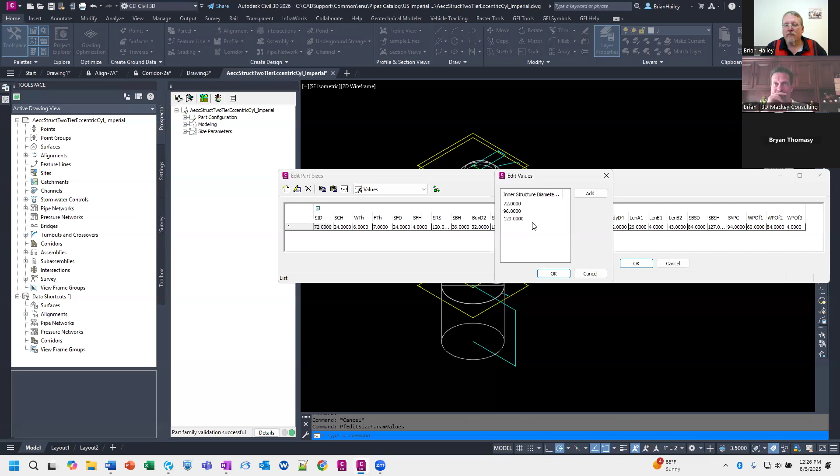So the available options. You can just come up here and choose edit. It'll list all those available options, and you can just add in a new size. So that's what I've done.

My recommendation is if you need a custom part built in Part Builder for your organization and you think you will benefit from that, hire somebody to do it for you, and I will not be the one you hire. Amen, brother. I do not like Part Builder. I've spent way too much time in here and I despise it, and no thanks.

Agreed. So Jason keeps saying the only way to truly do this is Inventor plus infrastructure parts, that's the total way to do it. Trying to use Part Builder natively is not fun. I'll try to leave that as untouched as possible, so that when I'm going through and updating to new versions, migrating it forward is not as difficult.

Again, I will preach that this is symbology that's on your plan set. You need something in greater detail, create a detail. Don't, I'm right there with you, Brian. Yeah, for sure, it's one of those things. Know the limitations of your program before you try to go in and make it do everything, because you'll love yourself later.

That's one thing I always try to get into, especially with people that are new to modeling in 3D. You don't need to model everything perfectly. We do not need to show the bolts on the lid to the manhole to secure it in place, or the herringbone of your catch basin lid. Please, save yourself.

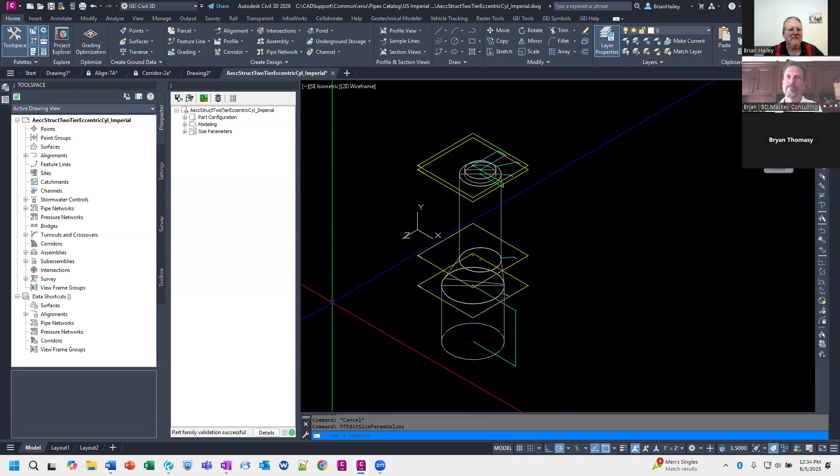So Brian, you're going, right? Yep, I'll be at AU for sure. Sweet, all right, we're hooking up. Absolutely. All right, later guys. Bye.